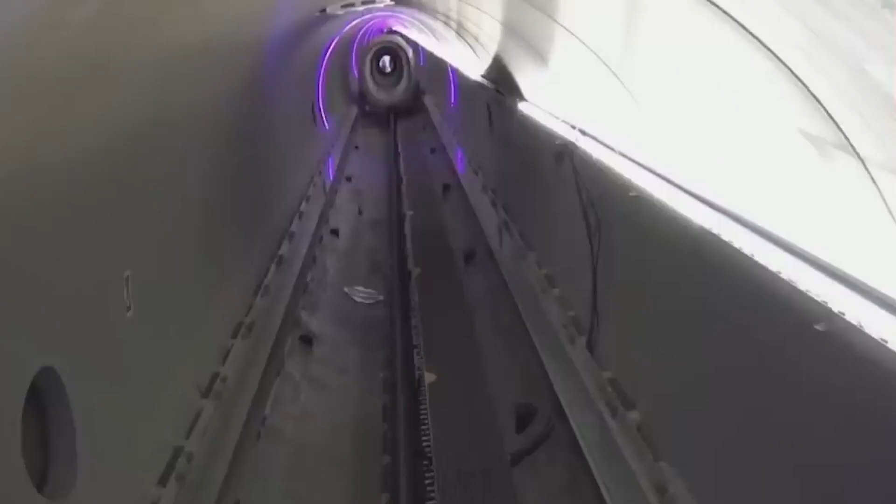So China's got this incredible thing called the hyper-high-speed rail, and it's no ordinary train. We're talking about mind-blowing speeds, 1,000 kilometers per hour. To put that into perspective, regular planes fly at about 900 kilometers per hour, and even the fastest Boeing 747 hits 1,120 kilometers per hour. And get this, the Hyperloop in China is set to match that speed.

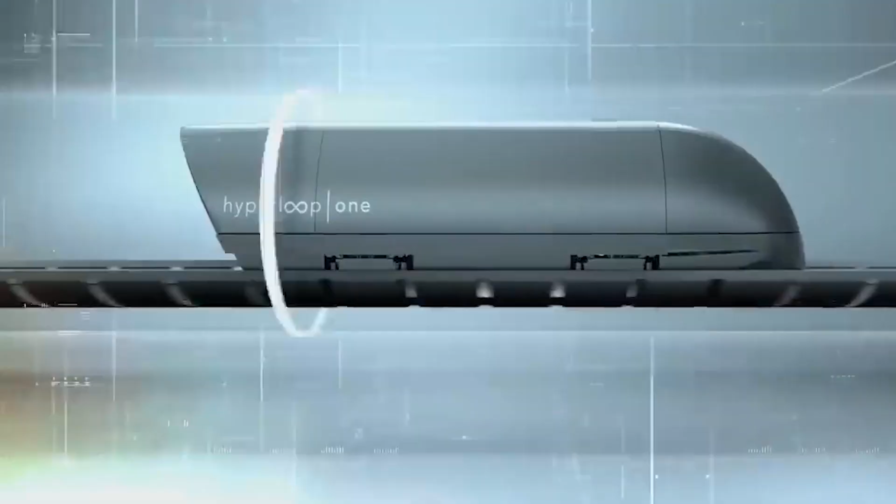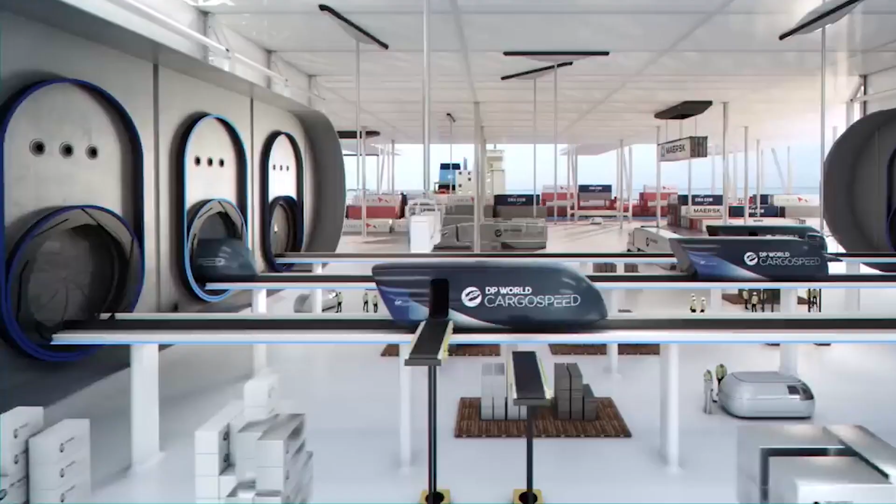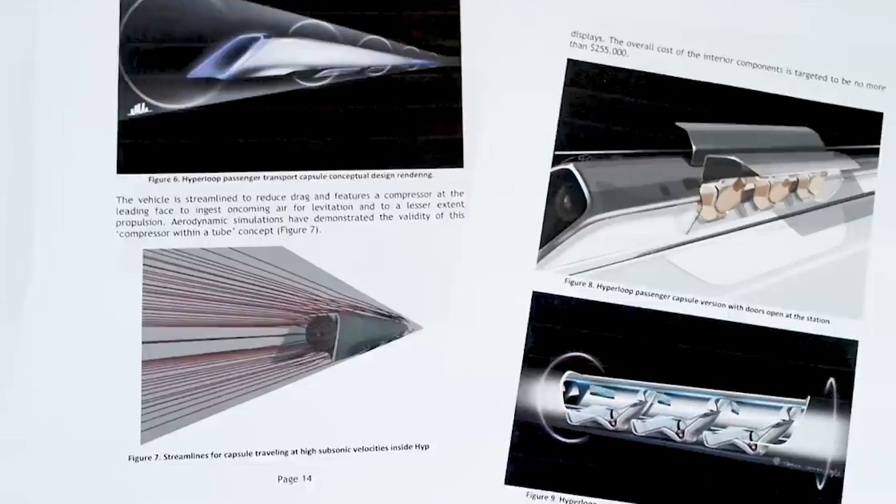This hyper-high-speed rail is a marvel, a colossal, ultra-high-speed, low-vacuum tube, maglev transportation system. Translation: it's a super-fast train gliding on a magnetic track in a vacuum tube. And this is not just any tube, it's the longest and largest of its kind in the world. But how does it work? Well, it's a blend of magnetic levitation and low-vacuum technology. Think of it as flying on land, a high-speed flying train, if you will.

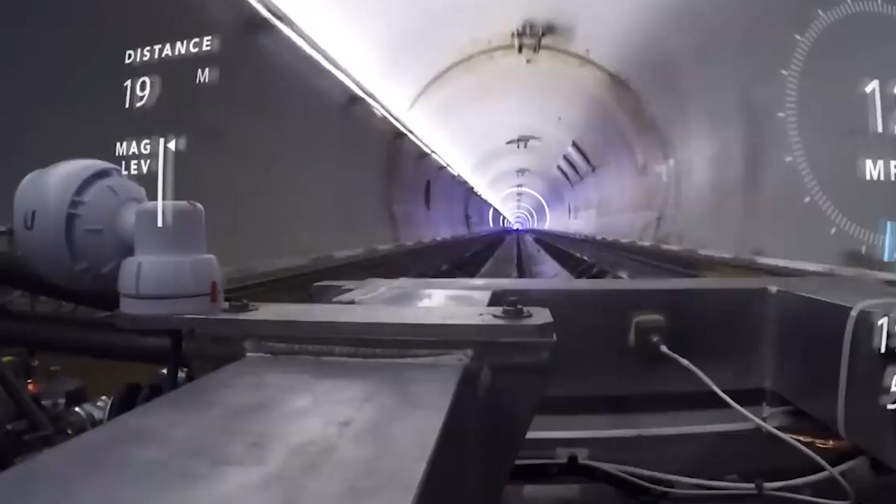Now, this Hyperloop is not just a dream. It's about to hit the testing tracks. If all goes well, the future holds a breathtaking connection between Shanghai and Hangzhou in just 9 minutes. It's the stuff of the future, and it's happening right now in China.

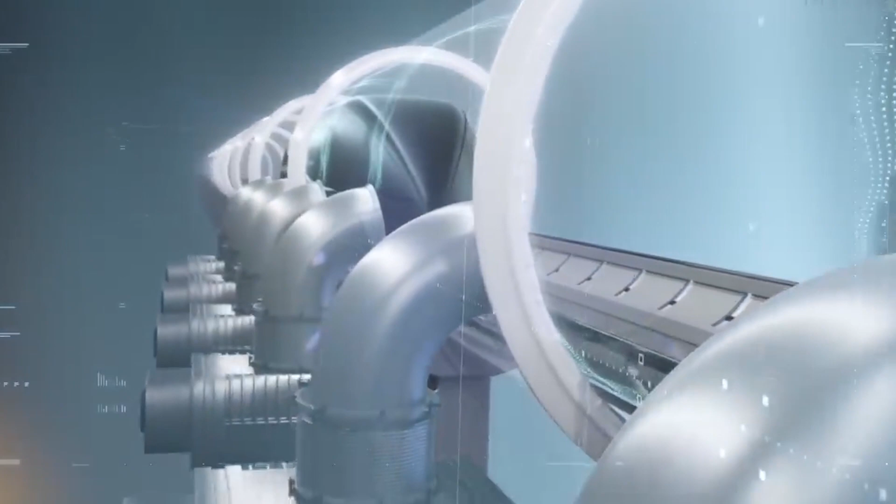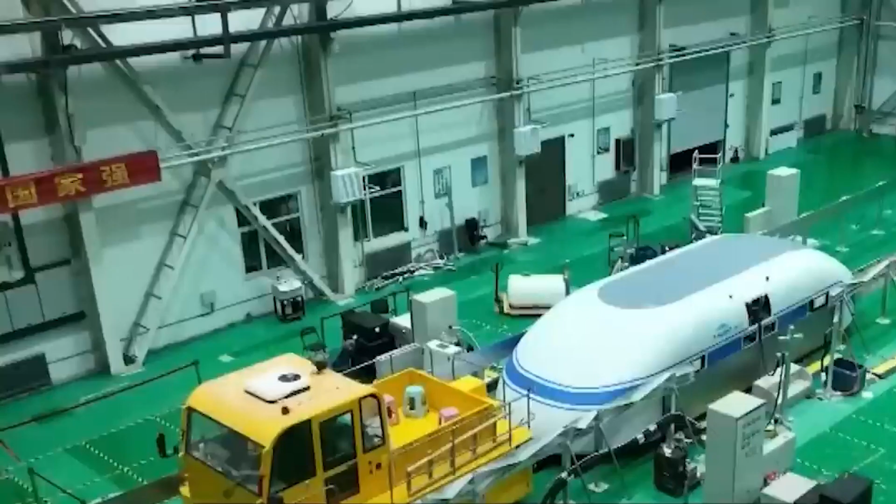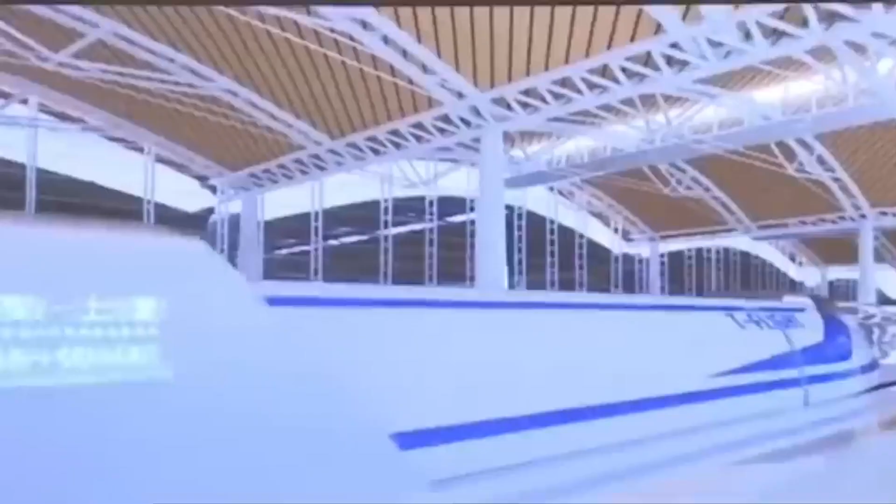Now, I know what you might be thinking. Zooming at 1,000 kilometers per hour sounds like a recipe for danger, right? But hold on, it's not as risky as it seems. The key here is not the speed itself, but the safety measures in place. Let me break it down for you. See, the Hyperloop isn't just about raw speed, it's about being safe. The real danger comes from unsafe factors, and guess what? The Hyperloop has tackled those head on. Here's why it's actually safer than your regular high-speed rail, airplanes, or trains.

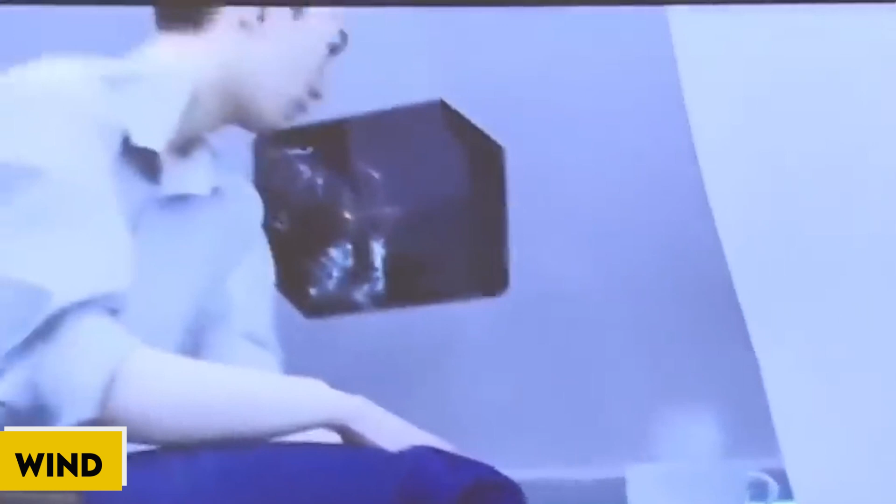First off, the Hyperloop rides on a fully enclosed track, shielded from the chaos outside. It's like a high-tech subway in a tube. Since it's magnetically levitated with no wheels, it's not at the mercy of other vehicles or wandering off course like an airplane. Wind? No big deal, the enclosed pipeline shields it from those gusts.

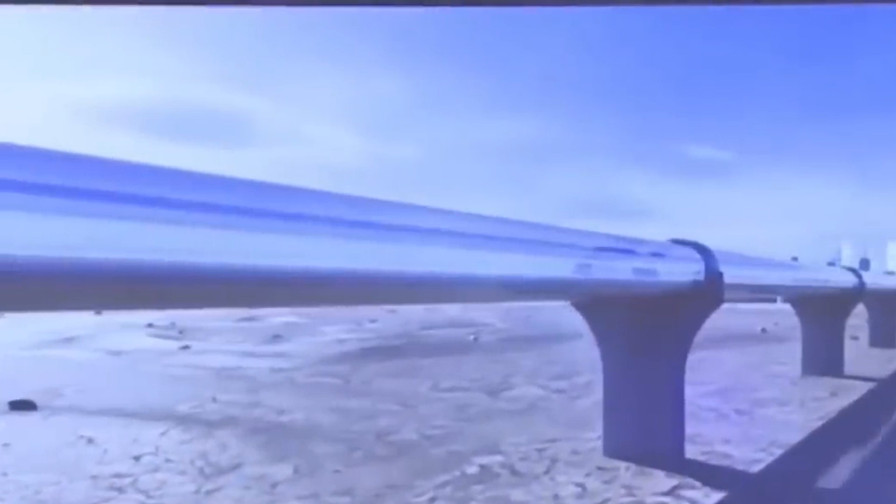Next up, the straight track. Unlike highways or traditional railroads with twists and turns, the Hyperloop zips straight through. That means fewer chances of risky turns, making the whole journey safer. And let's talk tech. The magnetic levitation system reduces mechanical failures. Unlike traditional trains with wheels grinding against rails, the Hyperloop glides on a magnetic force, minimizing friction and vibration.

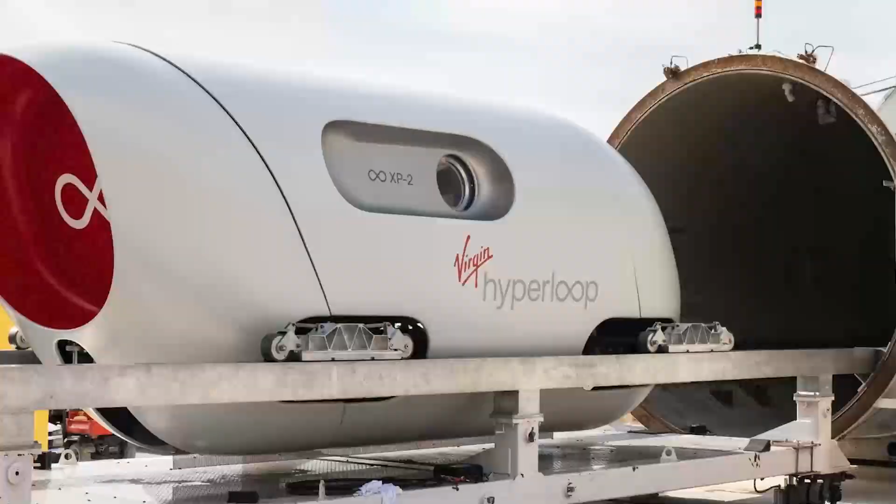Imagine this, you could zoom between Abu Dhabi and Dubai in just 12 minutes. Currently, that same journey takes a whopping 90 minutes by road. This is not your ordinary train. It's a magnetic levitation marvel. This capsule glides through the air or tunnels under colossal low pressure. Think of it like a futuristic subway that's not bound by the rules of gravity, and it hits speeds of 1,000 kilometers per hour. That's 3 times faster than your everyday high-speed rail, and over 10 times faster than traditional railways. It's not just fast, it's a whole new level of fast.

Now, you've probably heard of magnetic levitation and electromagnetic technology, but what about low vacuum technology? Low vacuum tech is all about playing with materials in a vacuum environment. It's like creating a space where things can happen without the interference of air and pressure. It's clean, it's efficient, and it's the backbone of the Hyperloop mechanics.

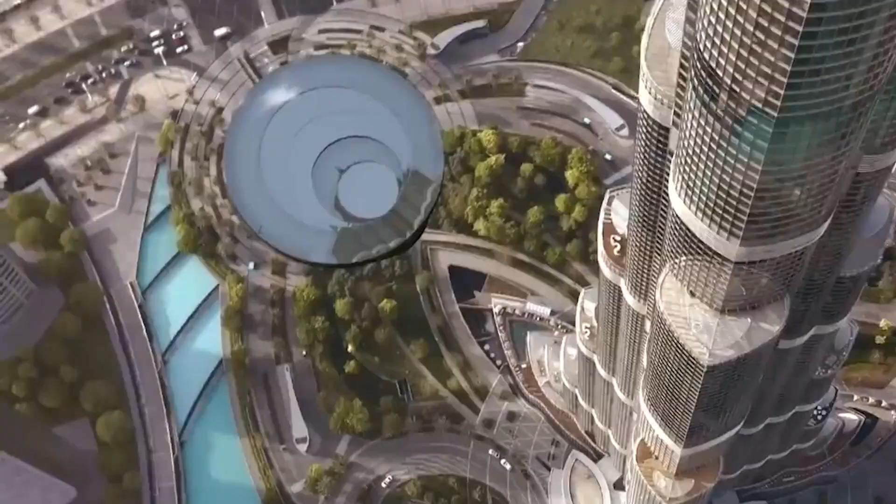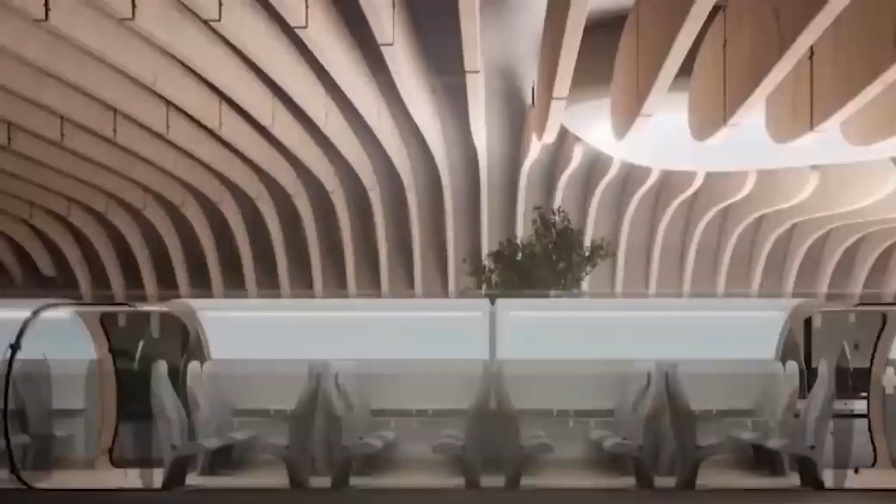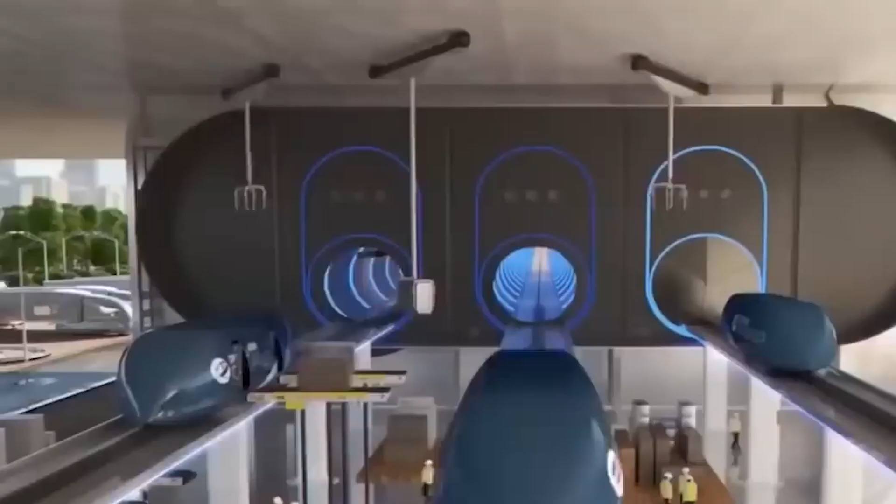This tech uses the flow characteristics of materials in a vacuum to process them in a low temperature, atmosphere-free, and low pollution way. It's a field involving vacuum production equipment, detection tools, and materials. The trick is to control the gas pressure on the material surface, making it bend to our will for various processes and property changes. In the realm of low vacuum tech, we've got vacuuming isolation, gas dilution, and other methods.

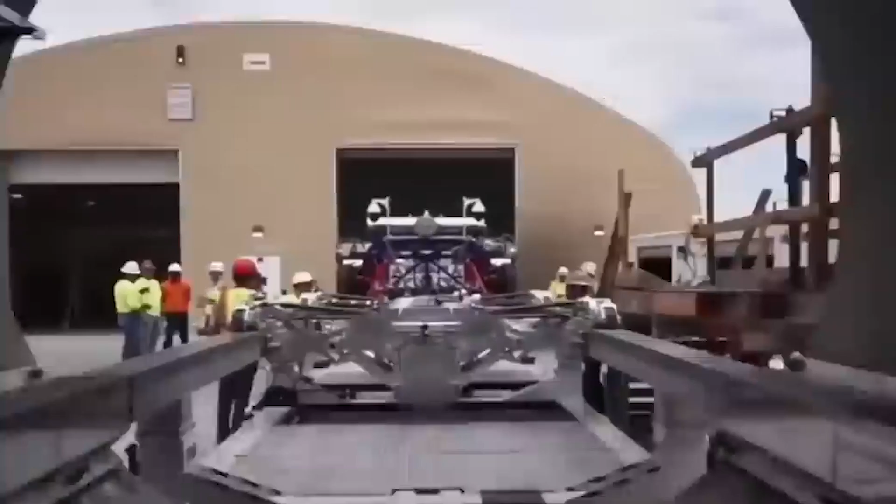The principle is pretty neat. Imagine using a vacuum pump to suck out all the air from a sealed chamber, reducing the pressure inside until it hits the low pressure sweet spot we're aiming for.

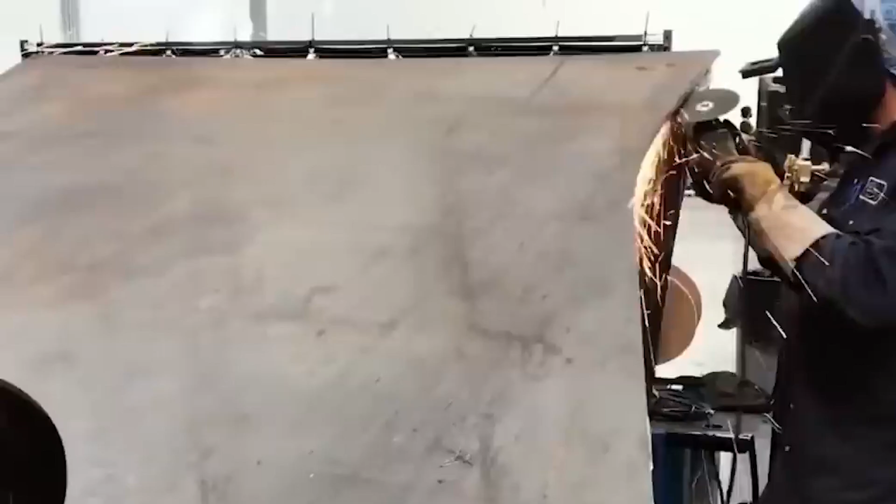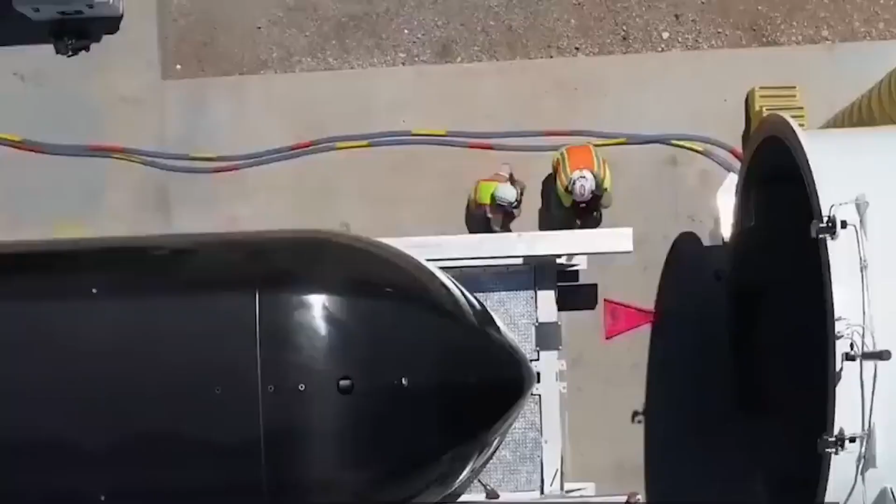Now, there are two ways of vacuuming: atmospheric pressure vacuuming and low pressure vacuuming. Atmospheric pressure vacuuming is like the grand exit of gases from a packed room, leaving it in a low pressure state. On the other hand, low pressure vacuuming isolation is where we seal materials in a cocoon, isolating them from the outside world.

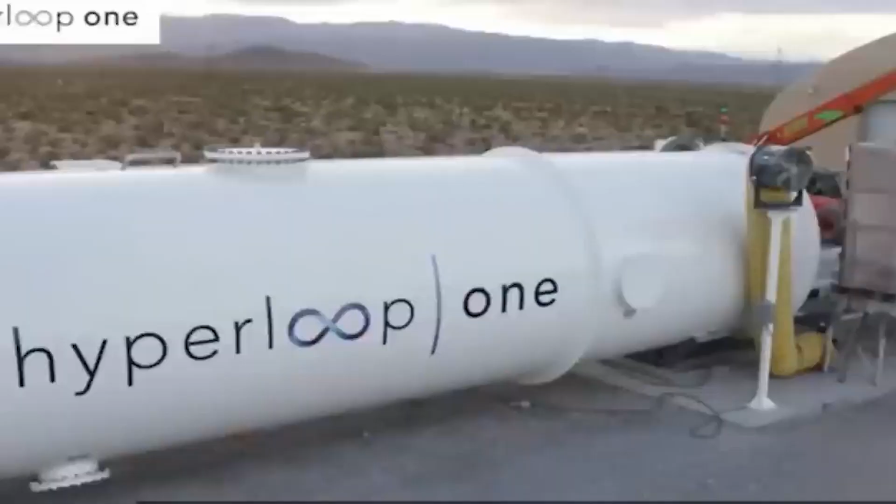This isolation reduces oxygen, moisture, and other components, preventing oxidation and environmental pollution, a shield for our precious materials. Gas dilution is another process. It's like injecting protective gases, such as nitrogen or argon, into a vacuum environment to dilute the oxygen and other molecules. This protective cocoon ensures the safety and preservation of materials and components.

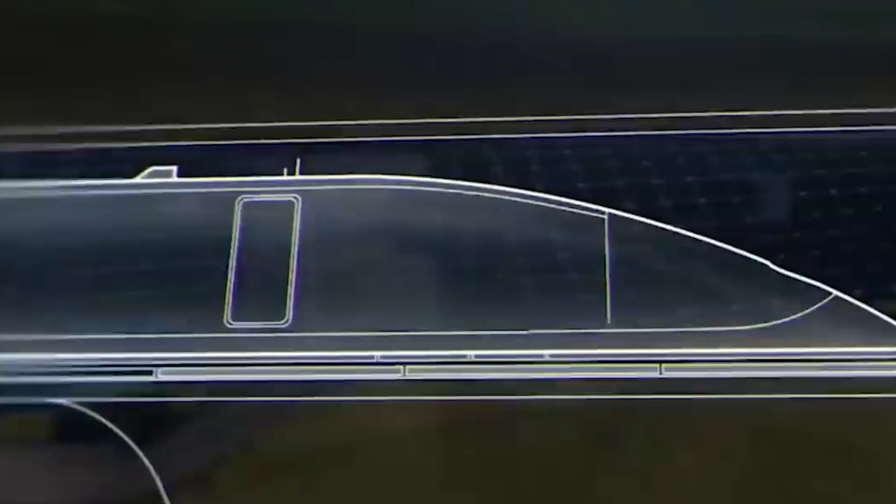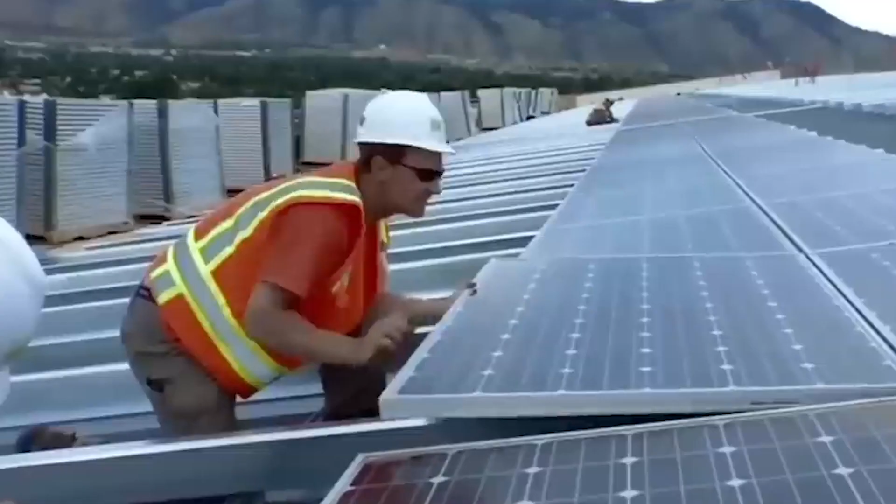Now, where does this low vacuum technology come into play? We're talking material processing, physical experiments, electronic device manufacturing, you name it. And here's where it gets exciting for the Hyperloop. According to a report from Hong Kong's South China Morning Post, vacuum technology is the Hyperloop's secret weapon against air resistance. When high-speed trains are on the move, air resistance is the thing trying to slow them down.

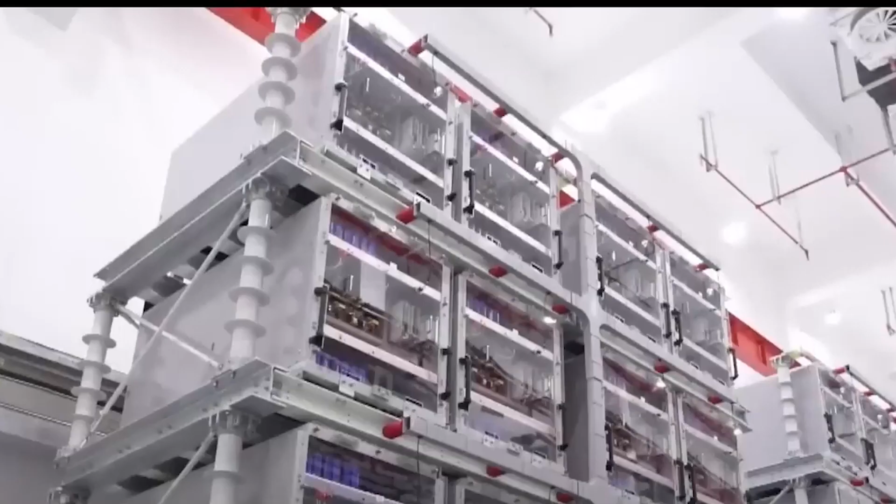As of 2022, China is a powerhouse in the realm of railways, boasting an extensive operating mileage of 155,000 kilometers, with a jaw-dropping 42,000 kilometers dedicated to high-speed railways, a global record.

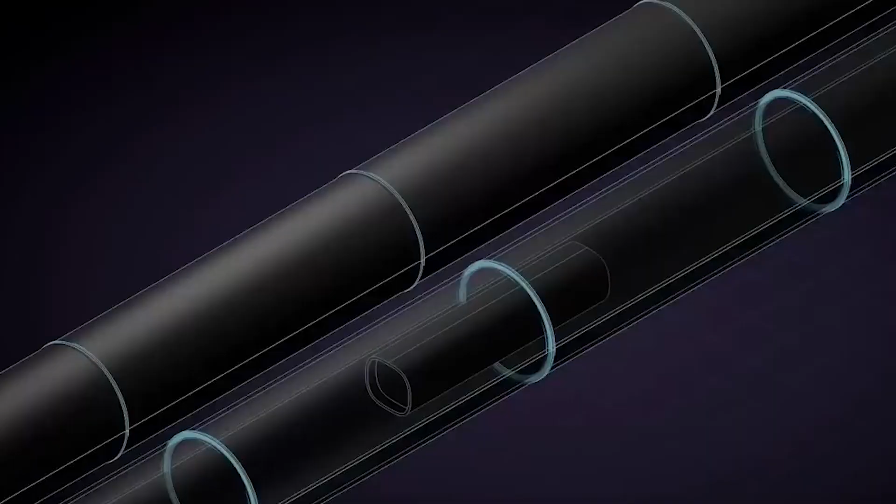But China is not resting on its successes when it comes to land transportation speed. Since 2017, Chinese researchers have been hard at work developing high-speed flying trains, pushing the boundaries of what we thought was possible. These flying wonders promise a future of unparalleled speed and efficiency, with the ambitious high-speed plan unfolding in 3 steps: speeds of 1,000 kilometers, 2,000 kilometers, and a mind-blowing 4,000 kilometers.

To put that into perspective, it's more than 4 times the maximum cruising speed of the Boeing 737. Imagine cruising through the vast expanse of China in just one day. Technology is turning this dream into a reality, propelling high-speed flying trains from mere concepts to tangible, fast-moving marvels.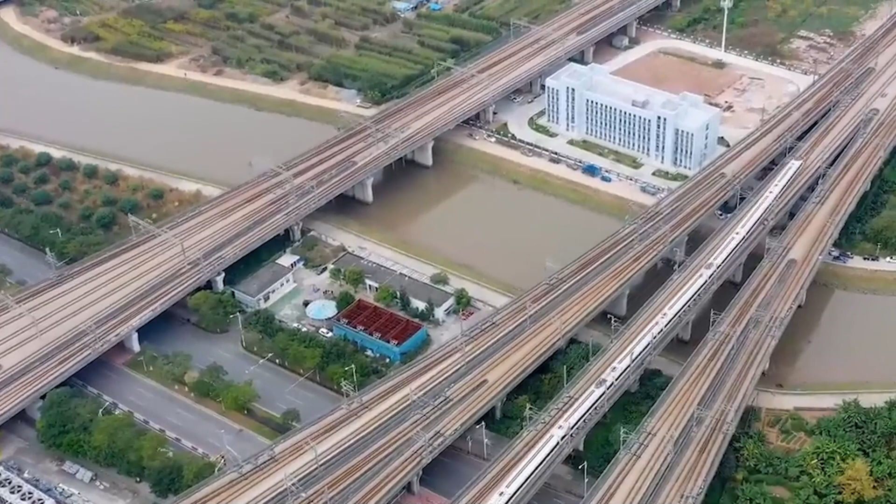But before these high-speed flying trains can truly take off, they need to undergo rigorous testing. That's where the high-speed flying train speed test line verification project in Datong, China comes into play. On November 10, 2023, with the completion of the last set of module support bosses, China marked the completion of the main project of the world's longest and largest full-scale ultra-high-speed low-vacuum pipeline maglev transportation system test line.

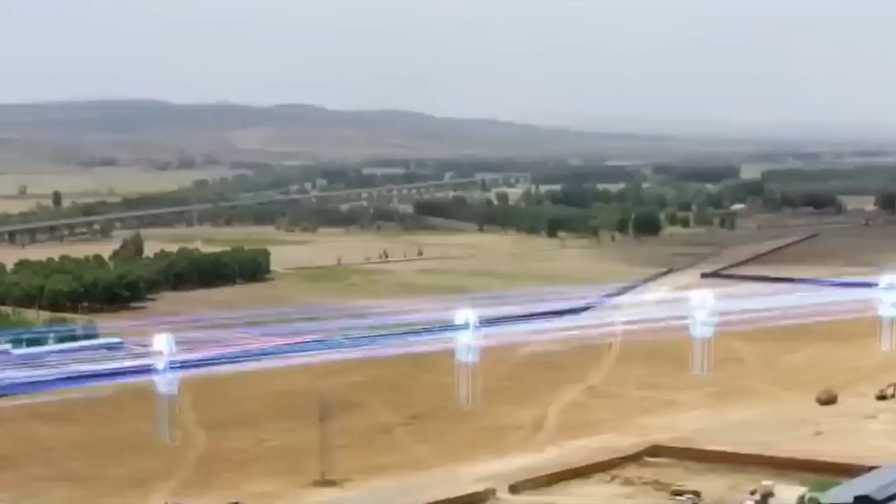A mouthful, but it signifies a leap forward in transportation technology. This test line, stretching across Yanggao County and Datong City, is a groundbreaking initiative, covering 2 kilometers and equipped with the world's first ultra-high-speed low-vacuum pipeline maglev transportation system. The project, unveiled on May 24, 2021, at the Shanxi Provincial Laboratory of Hyper-High-Speed Vehicles, has already achieved remarkable milestones.

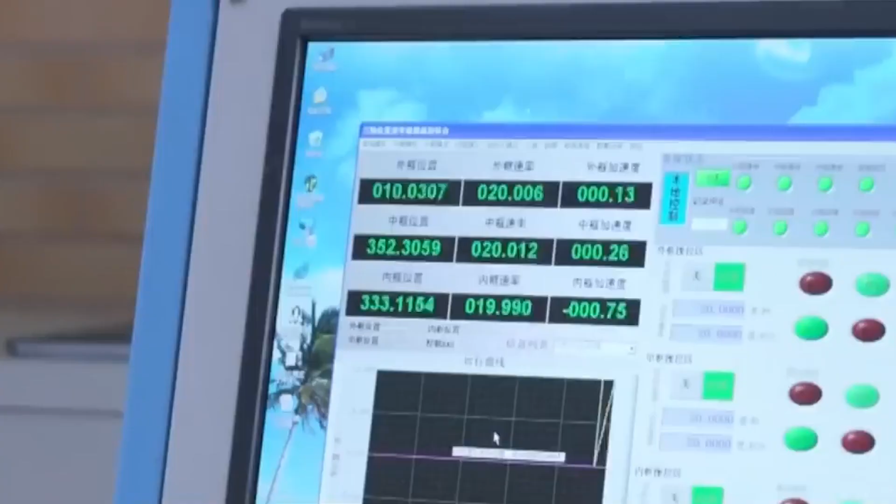It's not just about speed, it's about solving the mechanics and dynamics problems of ultra-high-speed and low-vacuum pipeline maglev transportation systems. While China's hyper-high-speed train Datong is currently in the test line construction stage, it's not just a project, it's a vision. With the substantial improvement in China's economic development and technological skills, the dream of a hyper-high-speed train network is within reach.